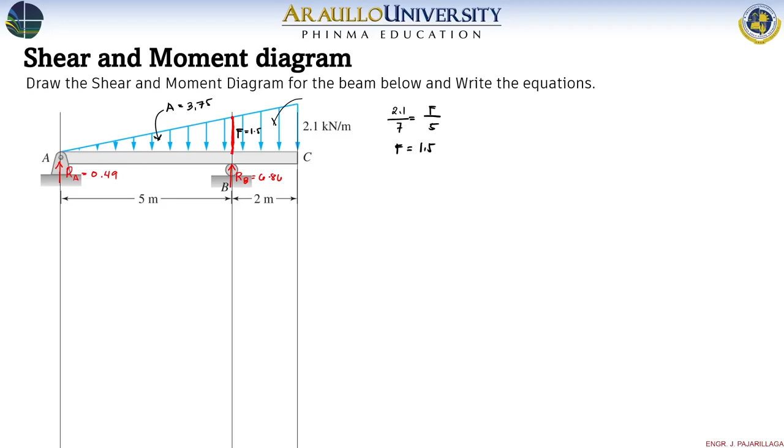On the other hand, this one is a trapezoid. So if we have a trapezoid here, with H1 and H2 tapos may length L, the area of this trapezoid is H1 plus H2 over 2 multiplied by L. Applying this formula to this one, the area will be 1.5 plus 2.1 over 2 times the length of 2 meters, or what we have is a 3.6 kilonewton area. Now, since we have found the area, pwede na natin gawin yung ating shear diagram.

So, this is X, and this is our shear. Plotting this, at point A, we have a 0.49 na load. So, again, the relationship pa rin, babalik tayo. V2 is equal to V1 plus area ng load from points 1 to 2. And for the moment, M2 is equal to M1 plus area ng shear from points 1 to 2. So, in this case, ang tinutukoy na area ng load is the equivalent concentrated load.

Now, we have here points A and C at the end of the beam, at sabi natin, sa mga points na yan, our shear and moment diagram is 0. Provided this relationship, we can determine that 0 plus the equivalent concentrated load at A is 0.49 positive. So, aangat tayo dito, positive 0.49. Next, since there is a change of load na negative 3.75 dito, that would be 0.49 minus 3.75, which will give us negative 3.26.

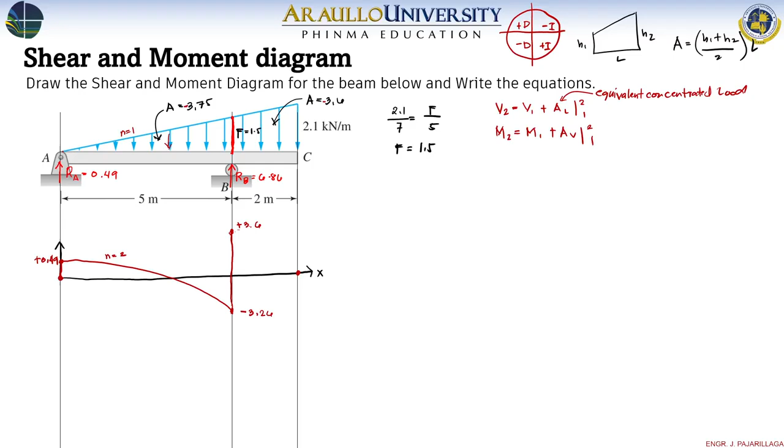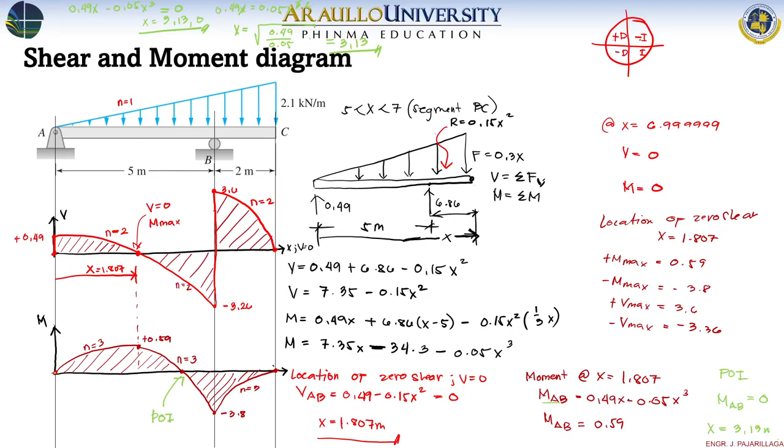And since the load is downward, negative, and is increasing, negative increasing, so ito ulit yung curvature natin. Okay? So, nagkaroon ako ng typo doon. So, the degree of this curve is also 2. Now, this is actually similar with this one. Okay? So, mas maganda lang yung drawing ko nung una, but this is our shear diagram for this curve.

Okay, now, let's try to construct the moment diagram following this relationship. So, however, the problem here is the determination of the area ng ating parabolics. So, the area of any curve is given by this. So, meron tayo daw rectangle na may dimension na, let's say this is B, and then this is A, and let's say meron akong curve na ganyan, na ang degree ng curve ko is greater than or equal to 2, yung area ng portion na to, this will be 1 over n plus 1 AB,

and then this one is, let me correct this. Sorry, let me just correct that again. This is n over n plus 1 AB. So, itong nasa mas malaking area, that is n over n plus 1 AB, and yung mas maliit, that is 1 over n plus 1 AB.

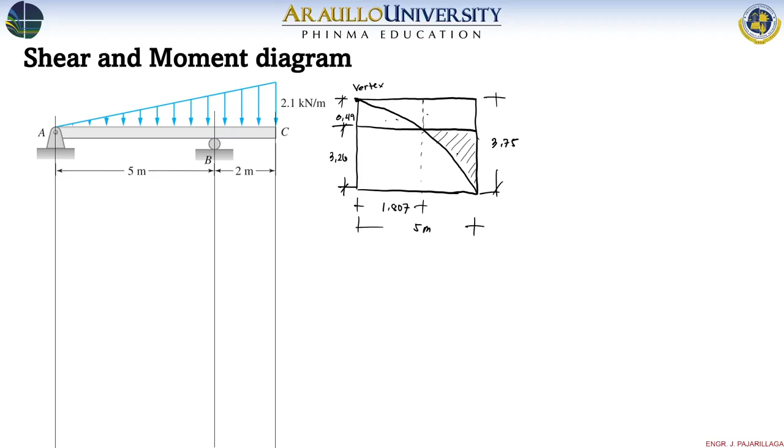So, we have already determined this area. We can remove this area, and then this, we can now find this area. Or, better yet, what we can do is we can find the whole value of this area. So, let's say, kunin natin yung buong value ng area nito. Dito kasi nagiging mahirap yung ating method of area. Let's say, kunin natin yung kabuoang area nito.

Okay? Since galing sa vertex yan, ito yung n over n plus 1 AB, wherein yung A ay 3.75 and yung B is 5 meters. And then, since nakuha natin yung area na to, makukuha din yung area ng maliit na rectangle na to. This is 5 meters minus 1.807. That is 3.193. And since kanina na-compute natin yung area sa baba, makukompute din natin to. Ito yung 1 over n plus 1 AB, wherein yung A naman niya 0.49.

So, i-shade ko lang ng green para malaman natin. Okay. So, isa-isahin natin kukunin yung area. Let's say, ito yung 1, ito yung 2, ito yung 3, and then ito yung area 4. So, si area 4 yung goal natin. So, our area 1 will be 2 over 2 plus 1, 2/3. Our A is 5 meters and our B is 3.75. So, that would be 2/3 ng 5 times 3.75, which will give us 12.5 square units.

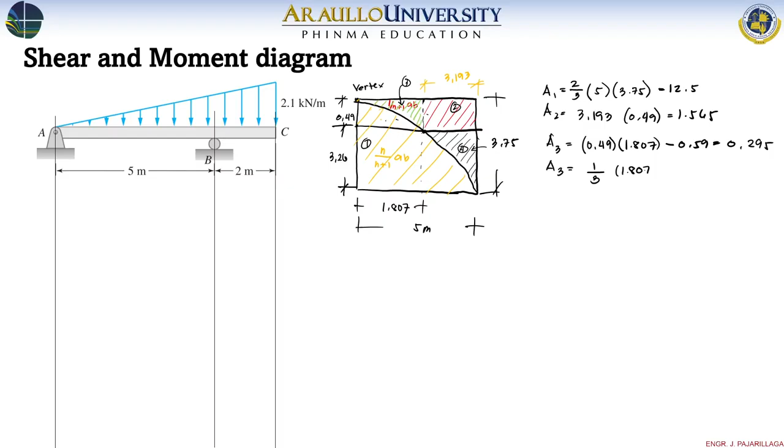Which will give us 0.295. Likewise, we can also solve A3 using this function. 1/3 naman siya ng 1.807 times 0.49, or this is also 0.295. Okay? Then, to solve for area 4 will be equal ngayon sa kabuuang area nito, rectangle na to, minus area 1, area 2, and area 3.

So, that would be 5 meters times 3.75 minus area 1, 12.5, minus area 2 na 1.565, minus 0.295. Or area 4 is 18.75 minus 12.5 minus 1.565 minus 0.295. This gives us 4.39.

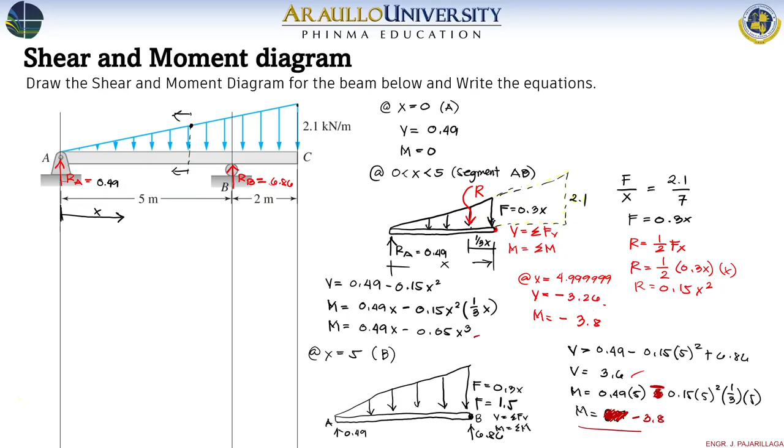Now, this method is very complicated. Talagang medyo challenging siya kasi marami talagang technique to determine this area. Especially ito, dito tayo nagkaroon ng konting confusion. So, I suggest every time you see a triangular or a uniformly varying load, you use equations, kasi hamak na mas madali yung ginawa natin sa equation compared sa ginawa natin sa area. So that's it for this problem.